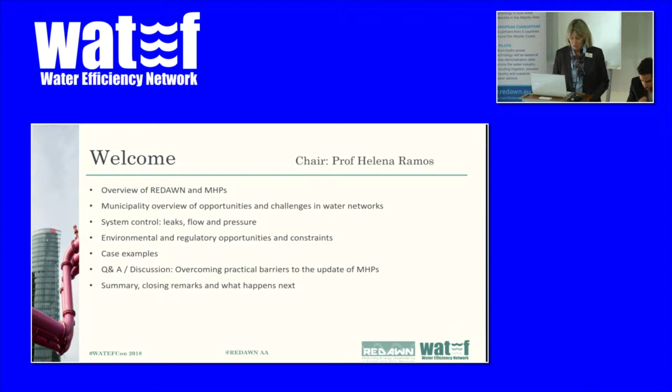Here we'll have our experts, and I pass the word to Dr. John Gallagher, who comes from Trinity College Dublin. He's assistant professor in environmental and system modeling, and is also a member of the REDAWN project. Dr. John Gallagher will give you an overview about the REDAWN project. We have here some information about this. Thank you.

Thank you, Helena, and good morning everyone. Thank you for coming along again this morning. Yesterday, for any of you that were here for the different WatefCon committees, the Water Energy Nexus is what I was representing at the time. This is a core part of what that committee is working on.

I'm just going to skip out here into my presentation. Excuse me for a second. So while I'm waiting for the presentation to be found, the REDAWN project is a project that came about in 2017 through a consortium of researchers and small and medium enterprises to enhance the potential of energy recovery using something called a pump as turbine.

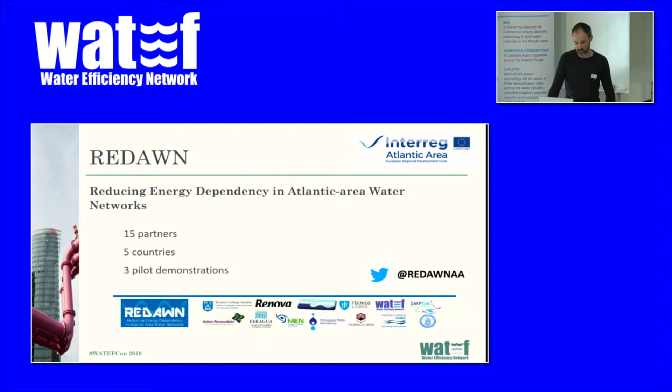For those of you who may not be dealing with water networks, there are many opportunities for energy recovery, and I thought I would provide 2 short, quick examples of these opportunities: one in water supply networks, one in irrigation networks. But our project is also looking at wastewater flows, industry consumption, industry demands, and water provision as well.

In water supply networks, an example of a project undertaken in this area, an initial feasibility study of energy recovery, something I was involved in 5 years ago - we explored Ireland and Wales as an example of 2 small pieces of the EU, and identified 80 feasible sites with the potential to recover 20 gigawatt hours of energy, just in water networks where there was too much pressure being dissipated. That had the potential to save 2.5 million euro in that small pocket of Europe.

There are also associated environmental benefits of recovering that energy, equating to about 10,000 tons of CO2 per annum for the water companies. Those figures equate to about 2% of the required energy for the provision of water. With increasing prices of electricity and water, the opportunity for the water sector to adopt this technology is very attractive. However, there are still many barriers that we need to overcome.

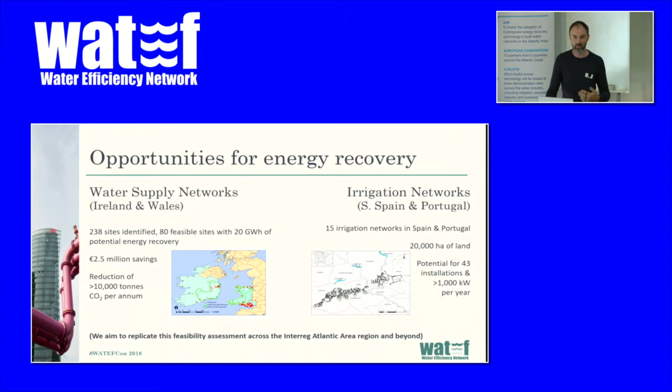So what we aim to do as part of this project is go beyond these pockets of Ireland and Wales and parts of Spain and Portugal, is to replicate how we've assessed the feasibility, to go and examine the potential in our area, the Atlantic area that is represented by our project, but able to assess Europe and beyond in the future.

So a very brief explanation of how micro hydropower in water networks works. You simply have a water transmission network and a water distribution network. And within that, you have various points where there is too much pressure. In these locations, you typically have forms of valves to release that pressure. What we explore is the opportunity to replace those with turbines, so instead of completely dissipating the energy, you recover that energy.

Now, why is this not already just happening around the world, you wonder? It seems quite simple in some ways, and the reality is there's many barriers. Turbines are quite traditionally an expensive component to recover energy, so there is a need for a low-cost form of turbine. Really, no one has assessed the market potential on a large scale beyond 1-2 countries, or a region of the countries in some cases.

There is a need for policy and regulations. There is a need to associate the environmental benefits and the social benefits that can be translated through economic savings and environmental savings. And for us, a key part of our project is a need for pilot projects to demonstrate the technology in action, to be a kind of final hurdle to persuade practitioners, explain to technical experts how this technology can work, and to water companies.

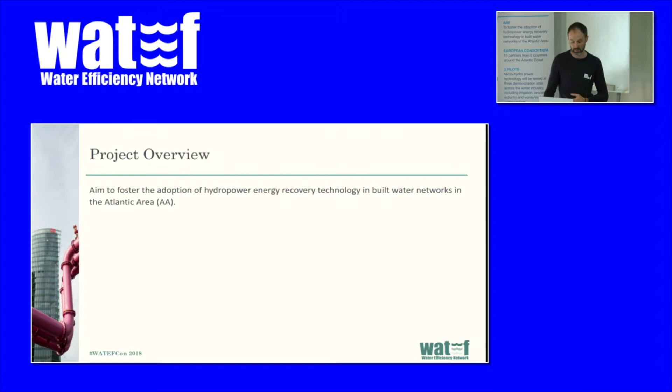So the aim of the project is simply encapsulated in this: to foster the adoption of hydropower energy recovery technology in built water networks. We hope to address institutional, social, and technological environments.

I'm from a civil engineering background, so really I feel more comfortable in the technological domain, if you will. But it's important to this project to address the three different core areas. And I think our speaker before dinner last night mentioned governance, and that's a hugely important element of what we need to deliver, ensuring that this technology is not just limited to physical demonstration and being technologically great.

So for those of you who are not familiar with the Atlantic area, it's an Interreg funded region in Europe, part funded through the European Regional Development Fund, and consists of parts of the island of Ireland, the west coast of the UK, parts of France, western France, northern Spain, and the Iberian Peninsula.

And so we want to look at the resources, what potential there is in these areas in the different sectors, look at what type of off-the-shelf technology can be taken, and look at what is this recovery potential. However, with most research projects, the availability of data to assess this potential is quite the challenge. But that's key to us having industry partners, water companies as part of our central delivery of demonstration sites to assess this correctly.

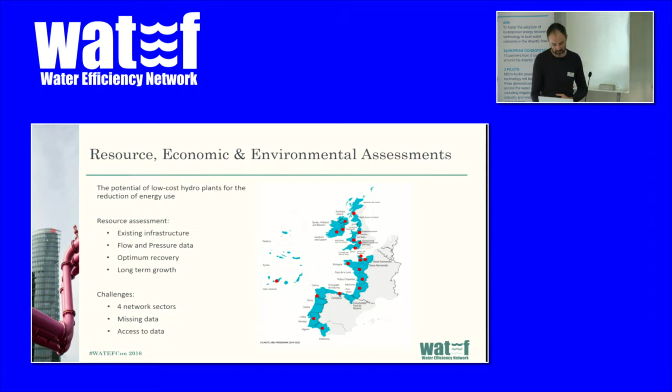And so this pump-as-turbine essentially is a pump taken off a shelf and operated in reverse. We had some of our team present some aspects of the project yesterday. I'm sure the presentations will be available to you at the end of the conference. But it provides a low-cost alternative. It does have a slightly lower efficiency to a traditional turbine. The performance, however, is still not fully captured, and that's an element of our project.

And it doesn't quite allow complete regulation of flow. But there's huge potential for it to work in parallel with existing control valves and allow for extra control to mitigate against leakage, etc.

In addition, the policy and institutional support tools is a key part of this project. So with the technology being developed by our academic engineering partners, we also have key partners delivering an understanding of how water companies work throughout Europe, how governance works across Europe, and how we can implement this in different parts of the EU.

We're delivering the message that it has environmental benefits for both customers and businesses. Our pilot demonstrations will be in operation over the coming 12 months, and for those interested in specific sectors like irrigation, process industry, or wastewater, you can follow our newsletter through the REDAWN website to track how these are being developed and events we'll hold around them.

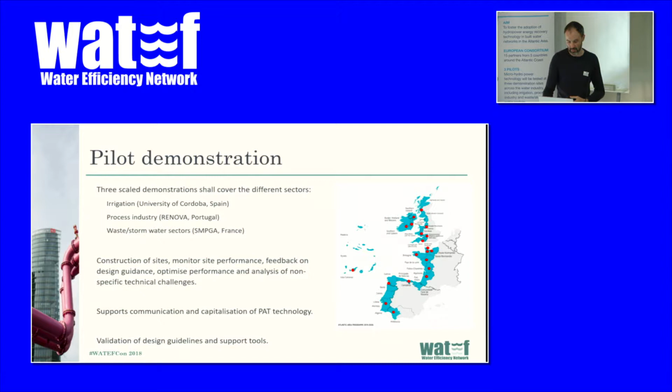So I'm going to conclude with that. Thank you very much for your attention. Our project REDAWN will have 2 more years of activity, and our demonstrations will be a key part of that. I welcome anyone interested to stay connected with us and find out more. Thank you very much.

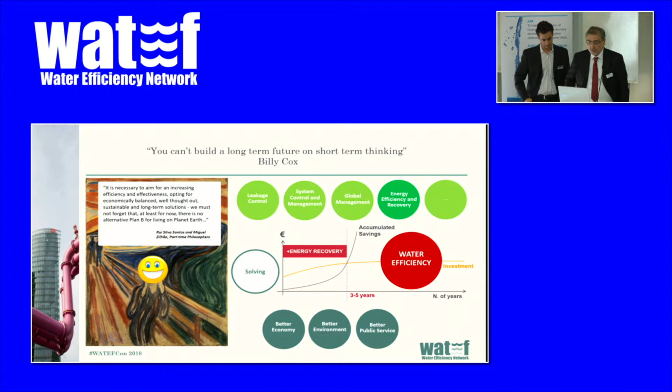So one of these sentences I think is important: we cannot build a long-term future if we think in the short term.

Regarding leakage in Portugal, the average amount is about 30%. In other words, 30% of the water coming out of our reservoirs is not charged. So we're talking about commercial losses. The greatest component is the real and physical component, which is in red over here.

We'll be focusing on that, because that is where we have the main water problem. We have a multiplicity of hydraulic errors and situations that all of us, mainly the people from municipalities, know very well, and we need to solve this urgently.

In terms of the hydraulic balance, what we are focusing on is real losses, in other words, leakages, and by solving that problem, we will solve several at once. We will decrease our leakages, decrease uncharged water, have a more efficient use of energy, and we will have energy recovery — once again, by being more efficient.

Let me just draw your attention to this statistic of 30%. We have several statistical indices to represent a specific problem. The issue is, by making these statistics, the places with higher consumption end up with lower percentages, because they have higher consumption. So this comes into the global pie.

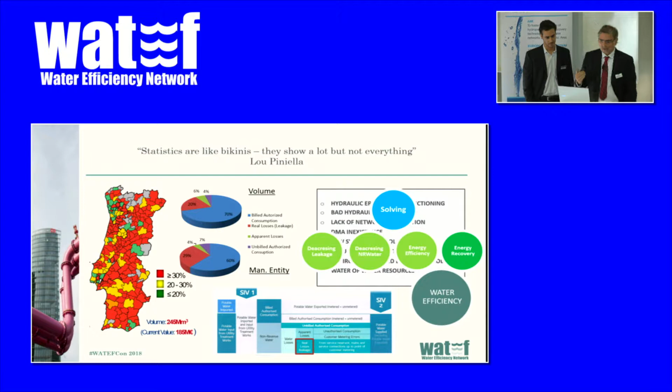In grid control, we have to know what we have and the speed with which we detect and repair our grid. Regarding the pressure part, we have the possibility or not of energy recovery. In other words, if it's possible, no problem; if it's not economically feasible, let's look at something else.

And as we'll see over here, we have several technologies, two of which will be presented right after.

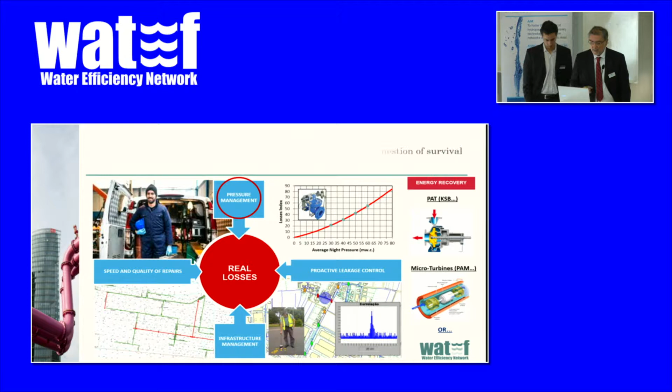We have to overcome these barriers that we've heard about previously to be able to have a better future. We have a whole set of barriers — technical, economic, etc. In the technical part, usually we have two big problems: the question of the information that is available, and human resources to be able to solve the problems.

With each one of them, we also have a whole set of problems. For example, in the municipalities, we have questions related to staff not having availability — each person has to cover several fields — and the information that is available is usually scarce. We need to look for it, etc.

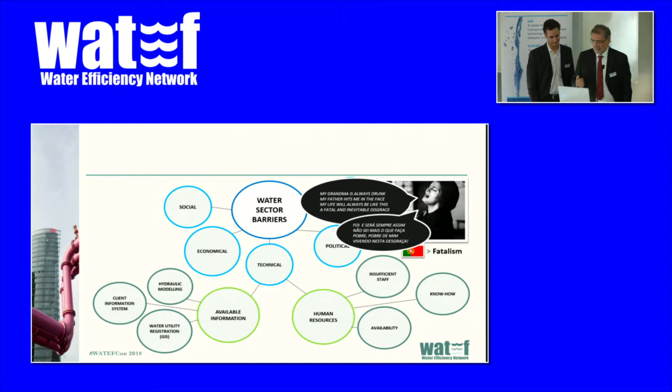Only death and taxes, as our friend Benjamin says. So in this area, it's no use being a fatalist. We need to move on.

Here, in this presentation, we are focusing on these two sides of this equation of water — in other words, the transmission that we will use as supply over here, and distribution.

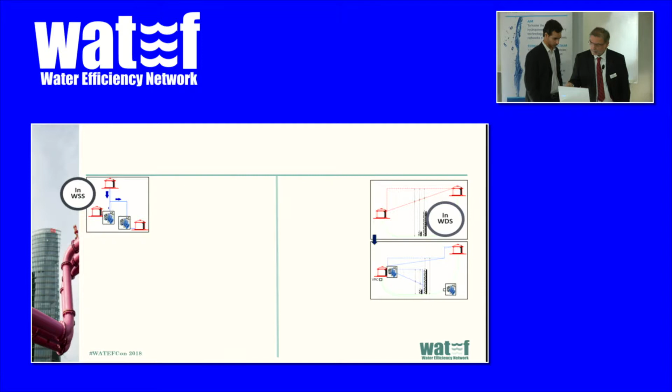In our daily work, we find a whole set of problems in which we have to control reservoirs in situations of transmission or manage pressures in a grid. We need to change the functions. We have to solve the hydraulic problem.

In Cascais, where our friend Pedro was, we worked in São João de Estoril, an area where we lowered the pressure from 5.5 to 4. What happened was, as we see over here, the flow at night decreased substantially to about half, so leakages also went down by about half.

Pipe bursts here in blue also decreased at the time, and the data that our friend Pedro gave us were at zero. At the time, I don't know what happened — he doesn't know either, because he changed jobs.

An example that we are working on at the moment is with the municipality of Santa Cruz. We have Engineer Gustavo, the head engineer of that municipality, in which we have reservoirs from 1,111 up to 0, because we have reached the sea. So we have a great potential here.

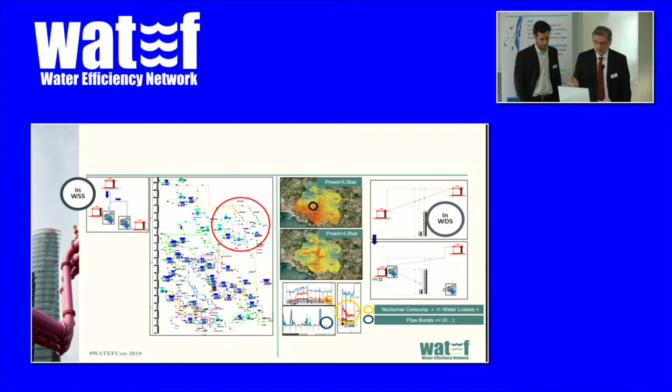Just a small example here in this area, not all reservoirs from the municipality itself, but in which we have a superior reservoir that supplies two inferior ones, in which the dark blue one can only be supplied when the lower level reservoir is full. In other words, we have the possibility of solving the problem with a control upstream of the intermediate reservoir to supply both of them and simultaneously being able to recover that energy. Place a good hydraulic functioning, and then after that we can recover energy.

In the same municipality, we studied a pilot area in which after all modelling, etc., in the existing situation, there were very few levels of pressure. In red, the main level of a reservoir at 180 level, almost up to sea level. So we have an enormous energy potential. By changing the system, we divided this into energy levels, so we also have a potential of energy recovery. But the focus is solving the hydraulic problem, and then we can or not recover energy.

So we need to take advantage of these opportunities to be able to solve the problem and simultaneously, in inverted commas, make money with it, with that energy recovery.

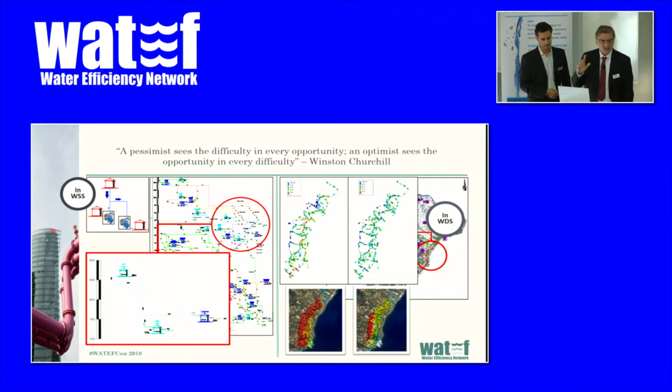Good morning, everyone. As Engineer Rui said, the main focus must be to fix the hydraulical problems within the water network. Only then should we assess the feasibility of energy recovery. In order to do that, we need to know where, how, and to do an analysis, a study of the potential of the energy recovery.

So where this kind of technology can be implemented, as it was referred, in water distribution systems or water supply systems or water transmissions. Of course, the first one, you have more restrictions such as pressure restriction, where you have to ensure the quality for the consumers. You have the total consumption divided by the network, and you have variables such as consumer demand that increase the complexity within the system.

In the water supply system, however, you have less pressure restrictions, and you can determine all of the flow of the consumption, and you actually would require a pressure control. So with a control valve, which Margarida can explain better, or why not a micro hydropower technology?

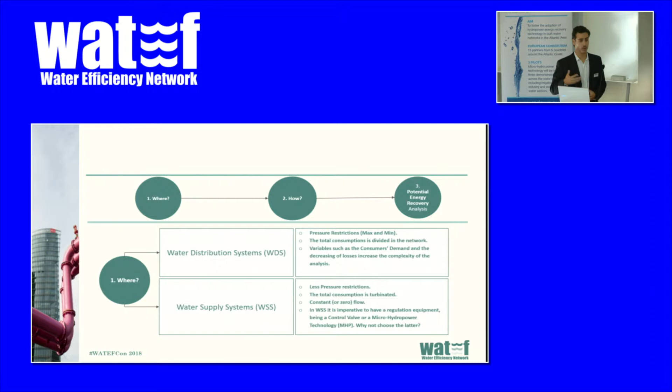So first we need to set goals in order to achieve our reality and to try to implement this technology. But how can we do that?

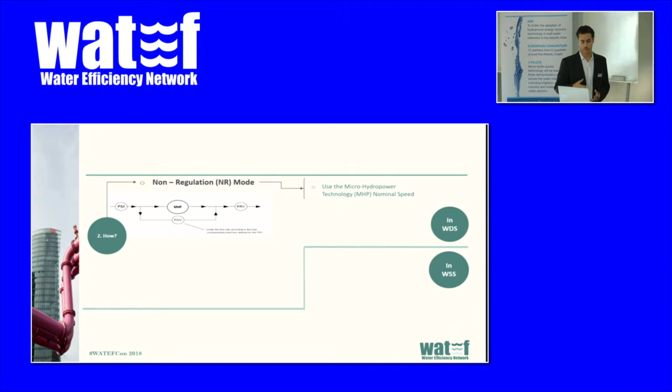In water distribution systems, for example, you have two regulation modes. The first one, a non-regulation mode, where you would require the flow meter and a bypass with a flow control valve in order to ensure the minimum pressure in the network. And you would have to have downstream a pressure reduction valve to ensure that the maximum pressure within the network is not exceeded. In this regulation mode, you would use the nominal speed of the machine.

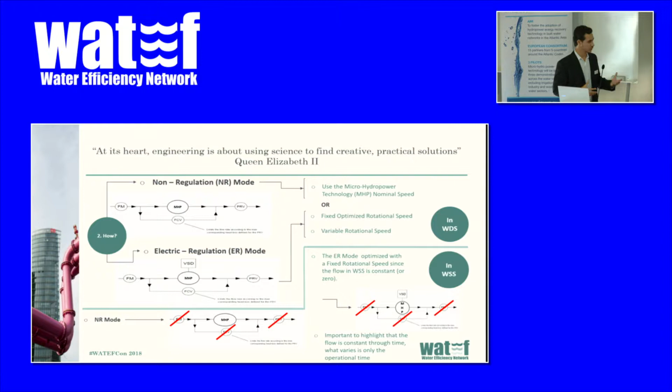Whereas in the electric regulation mode, you would have a variable speed drive that would allow you to fix an optimal rotational speed or to use a variable rotational speed according to the input flow rate within the machine in order to harness more energy. In a water supply system, since the flow is constant or zero, you wouldn't require that many equipments, but you could still use both regulation modes, where the electrical one, it would be more optimal to use a fixed rotational speed. It's important, as Queen Elizabeth II said, to try to combine engineering with science and all these disciplines.

In order to explain how important this analysis is, I'll give you an example in Madeira, in the municipality of Funchal. We did a study there in a pilot zone, where in order to fix the grid, we had to implement 50 pressure reduction valves. And out of these 50, only 10 of them had the estimated potential to actually harness a good amount of energy. And after some detailed study, only 2 to 3 of them actually had a good payback period.

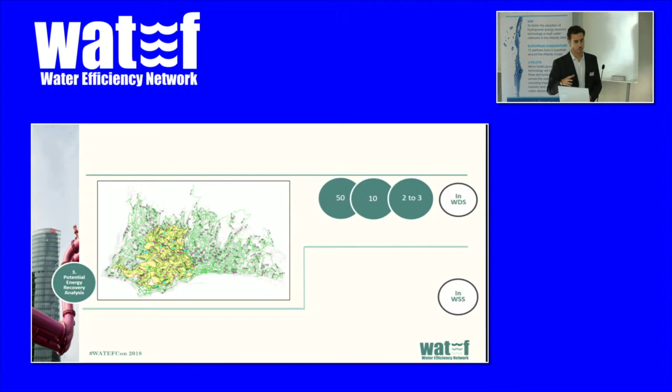So we need to study this first. As you can see in this graph, these show the 4 PRV location sites that would produce the most energy out of these 10 PRVs. You can see that actually only 2 to 3 of them would intersect the initial investment and have good payback periods. But it's important to highlight again that to fix the hydraulical grid, we need to install more pressure reducing valves. So it makes sense to compare the cost with the differential cost between implementing a total micro hydropower technology and its costs, or the difference between it and installing pressure reduction equipment and all its accessories.

And that means that we are talking about more or less 15,000 euros, well, half of the price.

Zooming in on a 5-year period, the analysis carried out before was for a 15-year period, since that's roughly the time required to decrease water losses to 15%. Zooming in on this 5-year period, you can see that the payback period would be 2 years in this latter scenario, and 4 years with the initial cost.

In a water supply system, however, we also did a study in the same reservoir, but this time upstream, because it's a water transmission system.

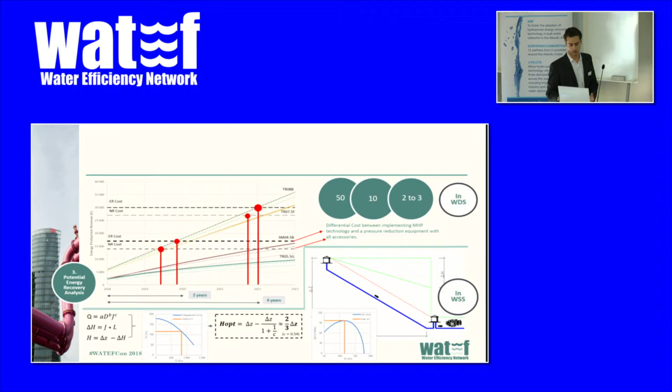Comparing the energy recovery between these systems, water distribution and water transmission, you can see there's a huge gap, because it's more complex to install this technology in a water distribution system. Thus, it's important to first analyze and study it, but first to fix the hydraulic problems within the grid, as this sentence illustrates.

In order to show you how we got to these results, at LNEC we developed a software called Sherlock. Sherlock stands for Selector of Micro Hydropower Technology and its regulation, lowering the operational costs.

This software allows us, as you can see in the picture, to choose different micro hydropower technologies and their rotational speeds, and this example is for a pump turbine, and then get the resulting energy output.

In non-regulation mode, you would use the nominal speed, so the results would be limited, but you can compare with the electrical regulation mode, and this software allows us to study all the rotational speeds and then fix the optimal one.

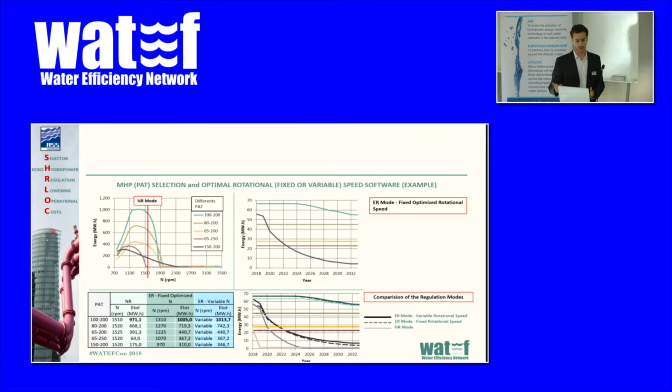In order to harness more energy, we compared this also with the variable rotational speed within the electrical regulation mode, and you can see that this last one produces the most energy. This is for the example of the PRV location presented before that had the most potential.

So the important thing to conclude is to never guess, because you need to first have a study, since our Sherlock never guesses. So you have to first do this study and then carry on to study the feasibility of energy recovery within these technologies.

Just to finish off in Portuguese.

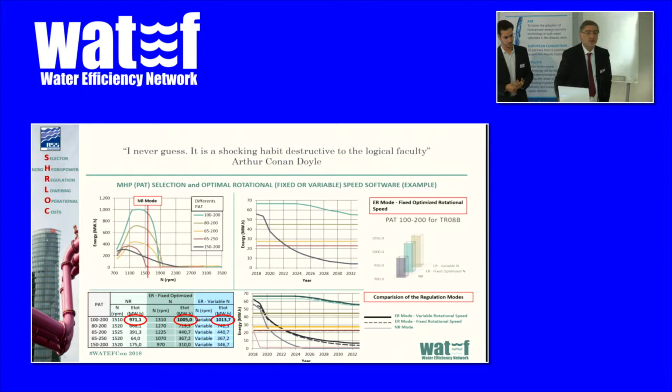In our presentation we tried to give you a global framework of the problems, and always highlight that the first step is to solve the hydraulic problem and see what we can recover, and to develop software for that goal. With the previous experience, we are trying to evolve in the sense that we do not need each person working separately in their own field.

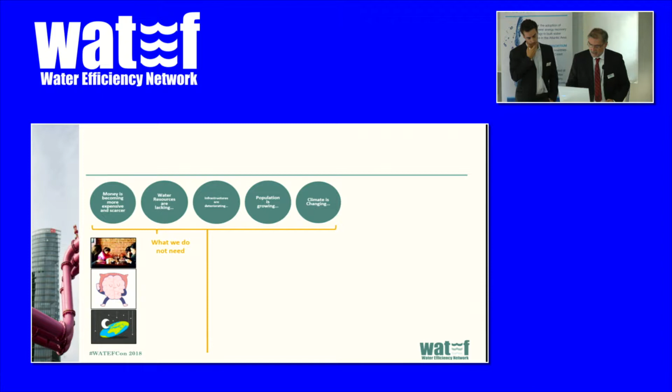This has to be a global effort. We don't want dormant brains. We need the capacity to move on. We don't need to have previous thoughts like 'the earth is flat'. We don't need to be prima donnas of knowledge, thinking 'I need to do something when I have everything, so I'm going to wait until everything comes down to me.' No, we need to move on.

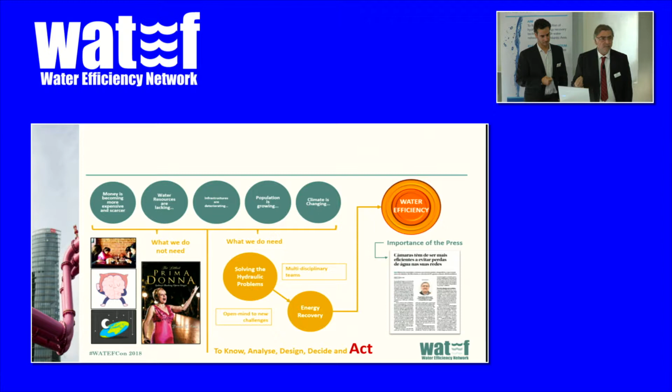We need to see if it's worth it, not only in terms of water efficiency, but also in recovery of money, not just making propaganda with nice faces in the newspapers. In reality, we need to know, analyze, design, decide, and mainly act. We cannot always just think about it.

Because in reality, to solve our problems, we cannot continue thinking always the same way. And that's it. Thank you very much.

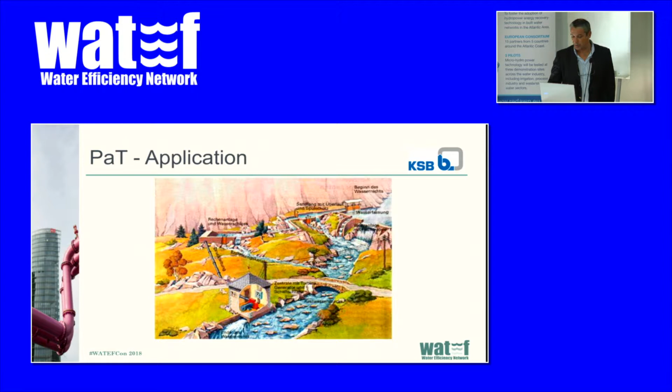And since KSB is a manufacturer of pumps since a long time ago, KSB developed a study to check and test their pumps working as a turbine, because there are some advantages to using the pump as a turbine.

Let's focus first on the turbine. The turbine was developed exactly to recover energy from water, and the turbine is wide in range control. You can use a turbine in several ranges of flow, for instance, with high efficiency. You can use the turbine with accurate design, designed to work for that specific system and with higher efficiencies.

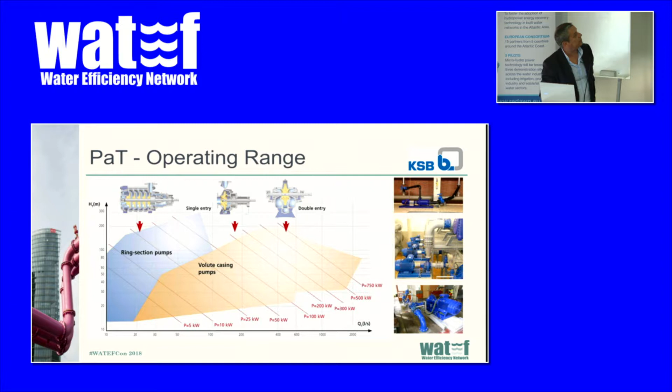We have the water coming in from the top, the rotation is in the opposite direction, the shaft is connected to a motor working as a generator, or even a generator, and could be another rotating machine on the other part of the shaft. And so this is as simple as it looks.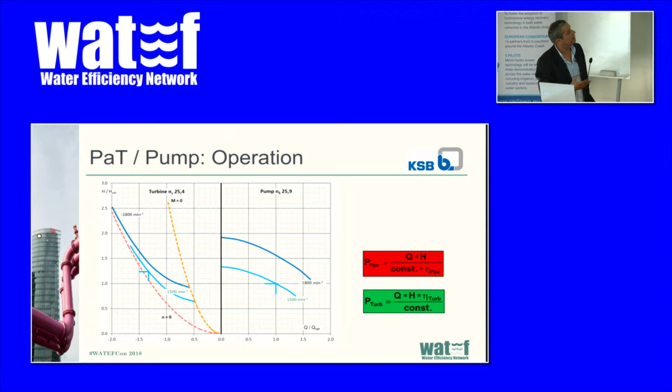We also can see that for a pump working as a turbine, usually the flow for the best efficiency point is a bit higher than the flow for a pump working as a pump, and also the pressure is a little bit higher than the pressure for a pump working as a pump.

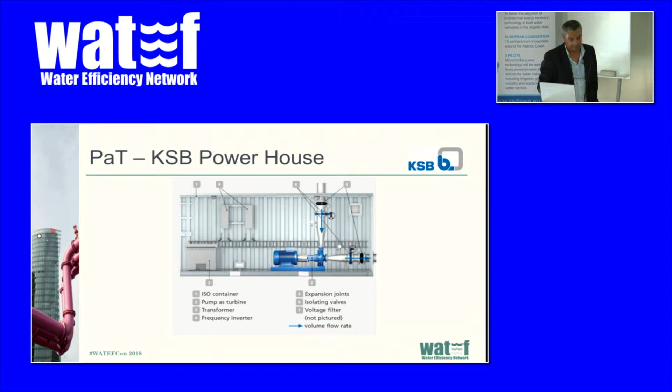KSB was a partner in this project, and they used 3 main pumps working as turbines, connected directly via a gearbox to some pumps. The pumps working as turbine transmitted rotation to the small pumps, and those small pumps could pump the water to the surface.

It had a head of 15 meters with a hydraulic efficiency of about 81%. The small pumps used to pump water to the surface for water supply were multi-stage pumps, each pumping only 16 liters per second for a head of 190 meters, with hydraulic efficiency of 75%.

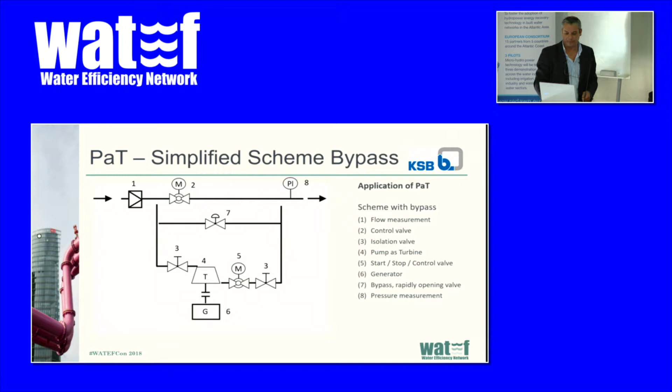Thank you very much.

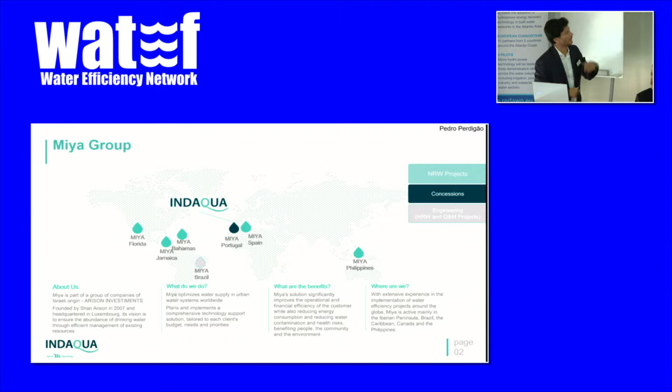So what am I going to do? We heard a lot about the word 'smart' these days. So everything is smarter since we have a smartphone. But are we smarter because we have a smartphone? I don't know. Smarter is something that we can get — intelligent, no, intelligent is a characteristic we have. Smarter is an ability, something that we can develop.

So I'll be talking about smart water utilities, which are kind of like a person, and looking at it from the non-revenue water perspective, because it's an area that involves many departments of the company, so it's a good area to create general motivation and to induce an improvement philosophy, okay?

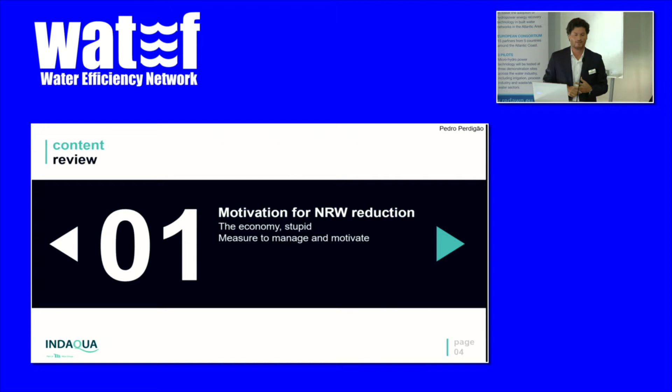So, starting with something that is very important whenever you want to change: it's motivation, okay? So what motivates companies to reduce non-revenue water? In my opinion, it's the economy, stupid — it's the phrase that one of the advisors of Bill Clinton told him when he was deciding in which areas he should direct his campaign.

So the idea is that people are motivated by economy. Believing that, what makes water utilities more motivated to reduce non-revenue water? On the right, you have the high, on the left, the lower motivation.

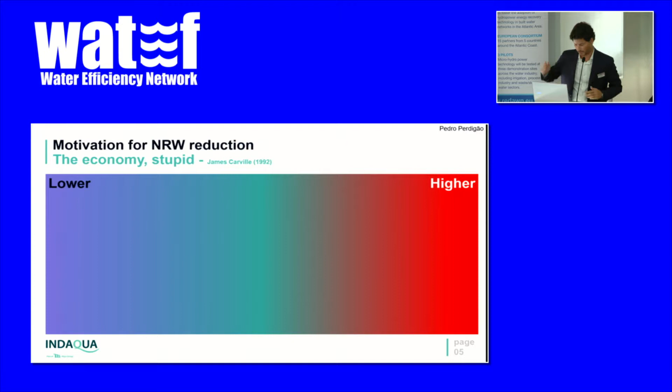The first one is, are the consumers paying for water losses? In many cases, it's a public entity, all the costs go to the tariffs or to the taxes, so the water losses doesn't have any impact on the company, it's all going to the consumer. In other cases, some companies earn some or lose some if they don't achieve an amount of non-revenue water. So if the water utility is partially assuming the cost of non-revenue water, the company will be more motivated.

A different thing is, where is the water coming? If it's a vertical system, where you take out the water and treat it, it doesn't have such a high economic value than when you're buying the water from a different company. So whenever you import water from a bulk water supplier, you're probably to be more motivated to reduce non-revenue water.

In some cases, those contracts have minimum consumption. And I've been in water utilities that had gone down by reducing water losses below the minimum consumption, so they were supposed to gain nothing and still pay for minimum consumption. So minimum consumption can be a motivator or non-motivator for reducing water losses.

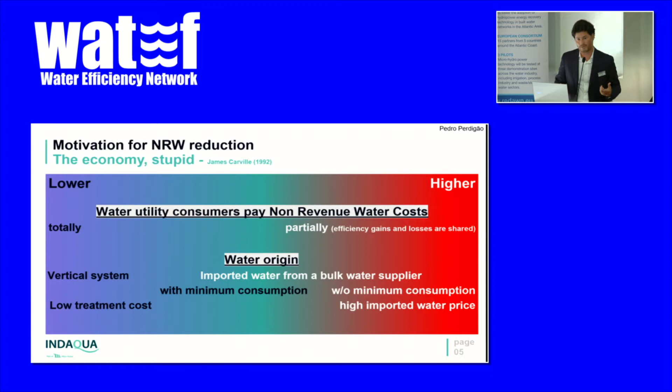And a different thing is the high water price. I think that water has more value than just the cost of bringing it to our homes. The scarcity and the tendency that we're seeing should increase the value of water. So if you have higher cost of water, you have more motivated water utilities.

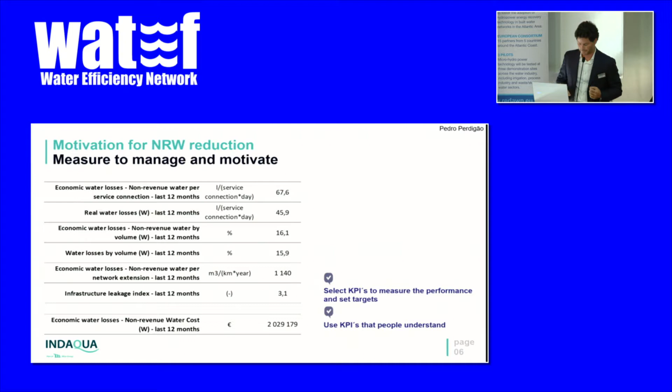Efficiency is so, the percentage is so good that even journalists understand it, but it's bad to compare companies, okay? So for instance, why not use an easy indicator in the water utility that is the cost of non-revenue water? If you put that in the P&L, I'm sure that it will probably become a more urgent matter. So measure and use KPIs that people understand.

Another thing very important is monitor. Monitor things, monitor hourly, monitor daily, monthly, yearly, depends. But monitor, measure, and benchmark. For instance, in INDAQUA, we have 6 companies, and they're all measured monthly on the performance indicator that we are using for non-revenue water, which is non-revenue water per kilometer of network. So monitor, put red lights, show that things are different, it's not everyone having the same results.

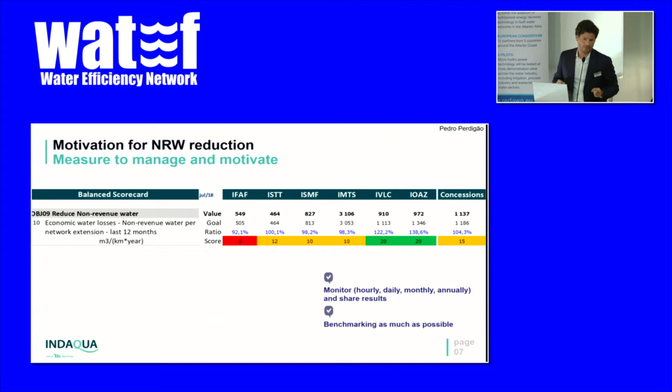About benchmarking, and about the percentage being a good example, you have to do it right. Not just using the right indicators, but also use a good source of data when you're comparing to others. In Portugal, our regulator has a very good source of data. There's another one called IBNet, but it's voluntary, it's not audited, but it's worldwide. But you can have good benchmarking just using the data that our regulator puts for free, it's public. So please make sure that you're not a little bit wrong with the image that you have of yourself.

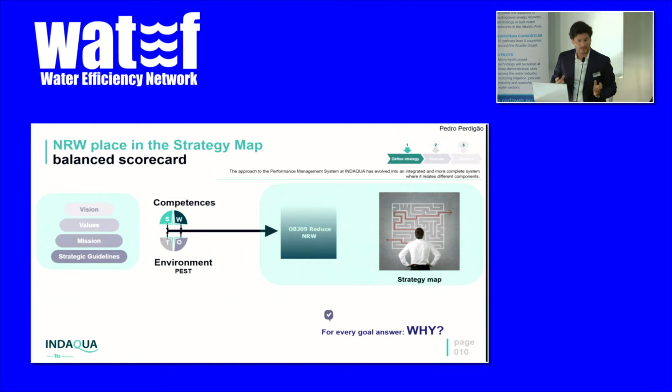So, what's the place of non-revenue water in the strategy? First of all, why should it be a goal? And you need to answer, for every goal you have, you need to answer why. So you go to your competences and to the environment, a SWOT analysis, very typical. And if you can combine a strength with an opportunity or a weakness with a threat, then you should have this non-revenue water. Maybe it doesn't need to be in the strategy map of the company, but you have to answer why, and why is very important for motivation.

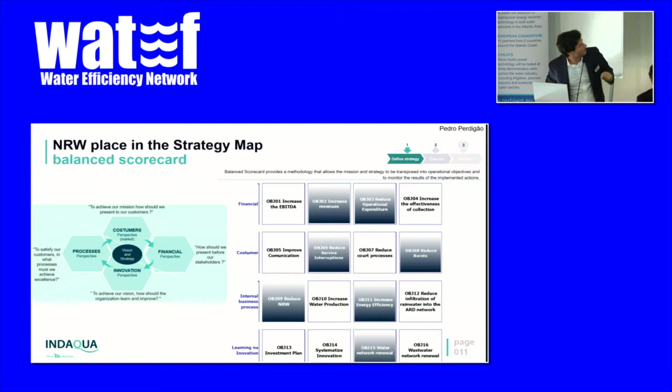Then there are tools like Balanced Scorecard, where you place in the map your goals, organize them, and it's a good tool to explain to people what's your strategy. And that's the place of non-revenue water in the global map of goals, in the strategy map of INDAQUA. But I like it because it interacts with many areas. For instance, we have water network renewal, or we have reduce service interruptions, or reduce bursts, and all that is related to non-revenue water. Remember that reducing bursts saves costs and increases revenues because people have water available, so they'll use it.

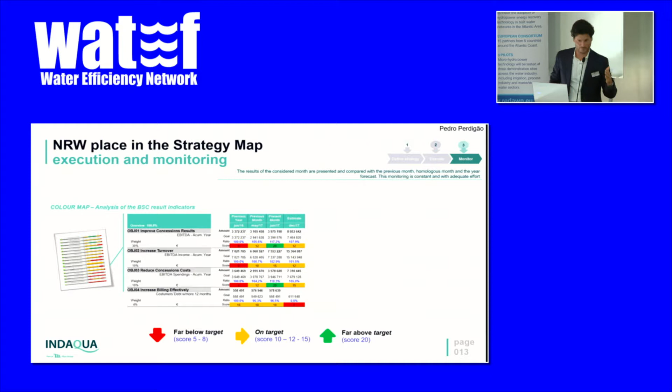If you answer the question why, and it's a goal for the utility to reduce non-revenue water, then answer the question how. Things don't happen by chance, you need to have a plan. This is just an example of the measurement we do, and some examples of the goals. Every month they are rated, and according to the deviation of the real value to the prediction, they are graded. We use the Portuguese school classification that goes from 0 to 20 because I find it more motivating.

So what's the difference between intelligent and smart? I think water utilities are a little bit like whales. They're so big, they're so protected, they don't have to be smart. They have a huge capacity for thinking and analyzing, but sorry to say it, as Rui was saying, they waste a lot of time just thinking about it.

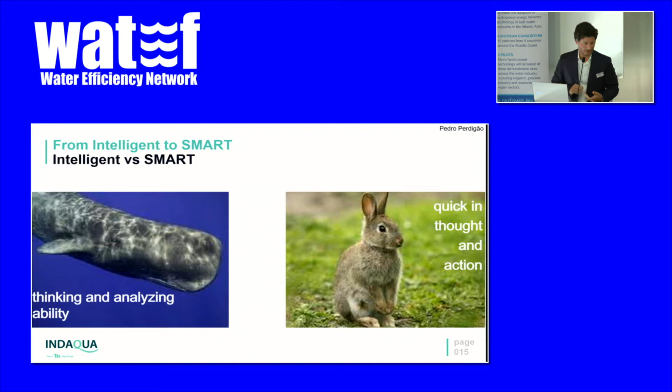And I think they need to become smarter. This is a smart animal. Why is it smart? Because he has good sensors - his ears, his eyes, his nose. He's very rapid thinking, and he has the muscle on his back legs to jump and get out of there because the wolf is coming. So he needs to be smart, and he can get smarter. So if you want to get smarter, you have to have all these dimensions.

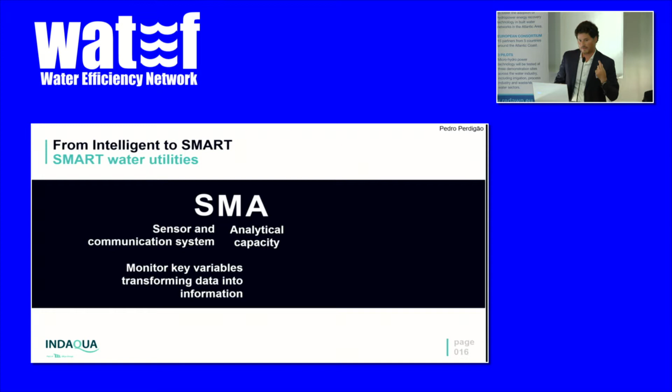Sensors - water utilities have been investing a lot in sensors, placing flow and pressure sensors and all of that. But then, as someone was saying in the morning, that means big data, so you have to filter, synthesize, transform data into information, and then you need analytical capacity. You need rapid thinking and decision-making, and of course you need the resources, and you need to be fast - you need timely actions. That's why we call it smart.

You don't need to stop being intelligent, because that's something you cannot change - it's a characteristic, it doesn't evolve. It's born with you, so you can still be intelligent, and you should understand the concepts, but I think water utilities need to be smarter.

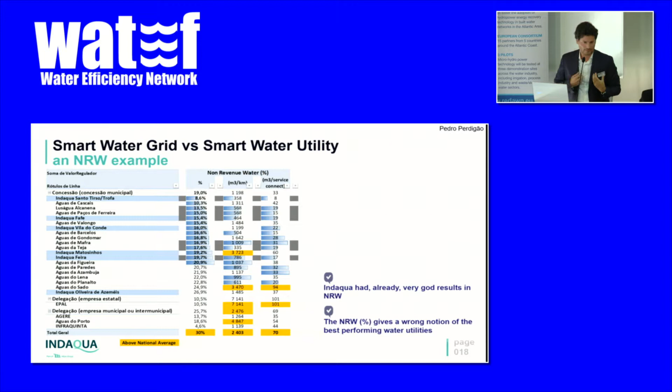So we did this analysis, and we thought, well, some of them are on top on all 3 indicators, so we believe some of them are very good. But what happened was that INDAQUA had gone down in non-revenue water per kilometer until the year 2013, and for several years was stable. We had, for instance, an ILI, an infrastructure leakage index, lower than 1, and our meter error is estimated at 2.6% - we take samples and do analysis.

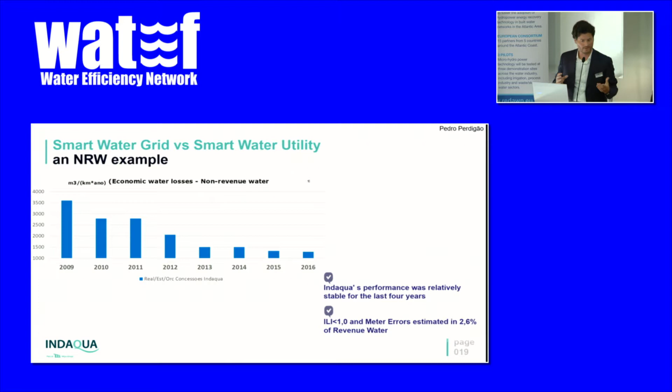So what could we do? First we did was, let's see if we are looking at the right variables, the key variables. We were using an automatic system - we decided it was like stop thinking, let's send data to that machine and she will tell you when there's a leak, send people to search for it. But we were not understanding the process.

So we went back a little bit, and decided let's see if we can put it on a human size, so that people really know the DMAs, know them by heart. It's not just having faith in a monitor. We also worked on the speed and quality of repairs and on the speed of leak detection. People forget, but we can do leak detection in many different ways, with many different supports, with good management, with good incentives - so we changed all that.

So what happened is, the blue line is the percentage of our network that we search per year. We went from 100 to near 300%, so we are searching 3 times the length of the network. The black line is the number of leaks we detected and repaired. That also increased. Nowadays, the number of leaks has stopped growing, while we're still increasing the percentage of search. So maybe we've reached a point where we should stop putting more effort into searching for leaks.

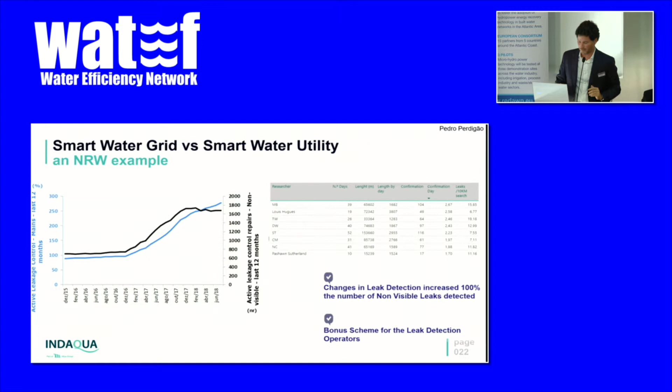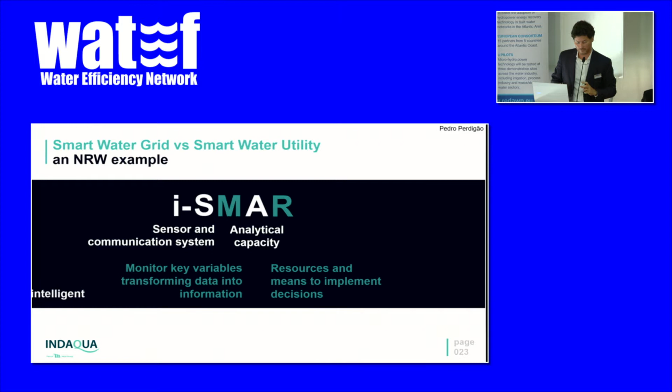Going back to that smart thing I was talking about, I think INDAQUA became smarter with the work we've done. What we did was work on the key variables, and we also worked on the resources. We improved the efficiency and effectiveness of our team, so we start finding leaks sooner, because I don't believe we are producing more leaks, we're just finding them sooner. That number must go down sometime. Okay, so that's it. Obrigado.

We developed this project together with the European partner based on 3 fundamental ideas. One was the fact that we have been hearing for a long time about renewable energy. We wanted to combine that with innovation to find a truly innovative solution for the market, an accessible, affordable solution with excellent revenue that could become attractive, with a service life of at least 25 years, and which could also be eligible, in our country and other European countries, for European funds. So the idea was to use the energy available in water supply systems.

There was also an idea in our mind to allow, in some systems, especially irrigation systems, which are usually in areas of difficult access where the electricity grid does not exist, we were constantly asked to try and get energy so that we could supply the tools, but also so that we could communicate that data to the managers of the systems. Besides that, there was also a need to develop the project with an interesting payback period so it could be motivating, because today the economy masters our whole life.

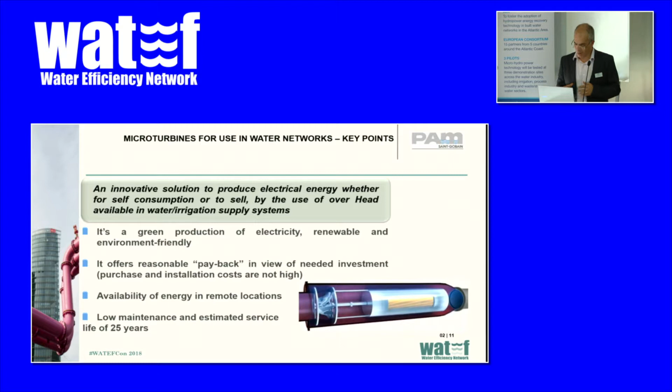So as I said before, we wanted a tool allowing us to supply energy in remote places, something easy to install, not a complex device, a very simple thing. And so we had to think about the following.

We all know that most water supply and distribution networks use pressure-reducing valves to create a head loss, to stabilize the pressure downstream and maintain it at a constant value. By doing that, we are wasting energy. We all know this principle: we have an upstream pressure that we want to reduce, and with such a control valve, we are wasting energy. Often this type of equipment is not working under the best hydraulic conditions, or not within the hydraulic parameters for which it was designed.

So this is the situation you can see here. We want a head loss, but there's always the risk of cavitation, which reduces the service life of the equipment.

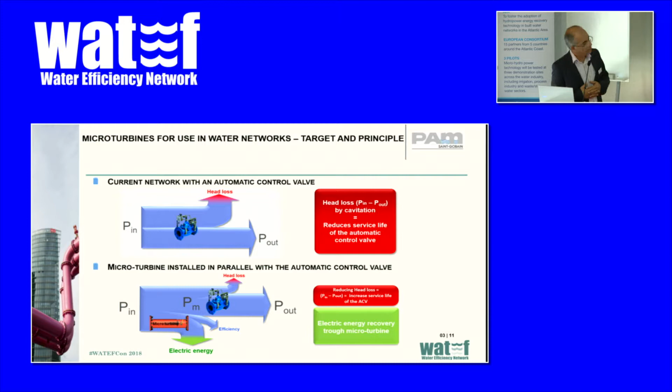So we thought of going to the same places and imagining the following: we are wasting energy here, so we have to implement a solution, and this is nothing new - there have been plenty of situations studied like this. We will place a micro turbine together with those valves, and try to reduce the head loss, the delta P, that the valves had before, so that we can recover a little bit more energy by using the micro turbines. So this was the principle underlying the project.

The equipment itself is very simple. It has a flanged tube in conventional carbon steel. It has single stage or multi-stage turbines with several diffusers and rotors. In the cross section, you can see the turbines at the entrance of the steel pipe. There is a mechanism making the connection between the turbines and the generator, and the generator is inserted in this steel pipe.

The water from the system, drinking water or water supply systems water, flows on the outside and helps cool the generator. It's a shielded generator, and there was also another assumption that we needed to make sure about.

We know that in water supply systems there is a high risk in some boxes, chambers, or confined areas. There's always the risk of flooding, and so we had that in mind. How could we insert micro turbines in facilities that had the risk of flooding? While developing this solution, we had to make it watertight, so if a flood occurred, we had to make sure the equipment would continue operating in normal conditions without any kind of risk.

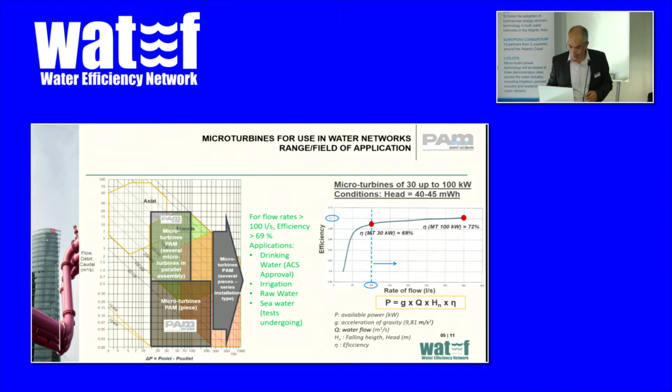On the right-hand side, you can see a graph showing the total efficiency. After 100 liters per second in a micro turbine of 30 kilowatts, we can reach an efficiency of 69%, a total efficiency of 69%. A 100 kilowatt micro turbine can reach 72% efficiency for flow rates of around 250 liters per second. So this is one of the examples.

Pressure reducing valve chambers is another possibility for the installation. This is the typical diagram of a pressure reducing valve chamber. The blue is the existing installation, and in red and pink is the part that we can build, sometimes without requiring civil construction work, and we can do the bypass and install a micro turbine.

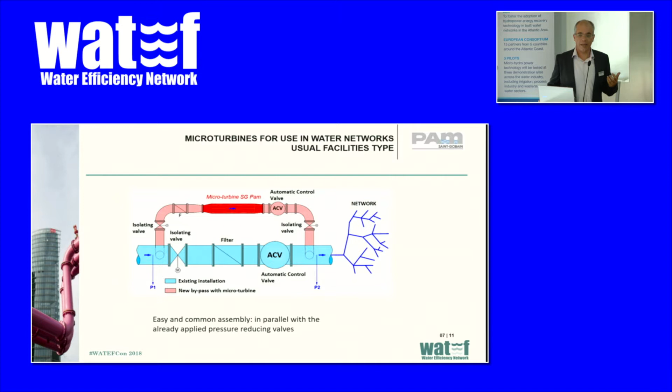Many could say, but why do you have that ACV valve there? What is it doing there? It is ensuring the 15 meters height. So at least between the entrance and the exit of the turbine, I need to have 15 meters. In a water supply system, I have to ensure that water column. That's why I cannot have a direct connection. I have to have a pressure difference between the inlet and the outlet.

Another type of facility, another type of installation: if I have enough pressure and flow rate, I can have parallel micro turbines.

To wrap up my presentation, this is a financial table that we drafted based on 7,000 hours of our working time. This means more or less 290 days. And we can see the different powers from 10 kilowatts to 300 kilowatts. We can see the installation costs, the maintenance costs. You can see the amount of energy recovered. For example, a 300 kilowatts unit produces 2.1 million kilowatt hours.

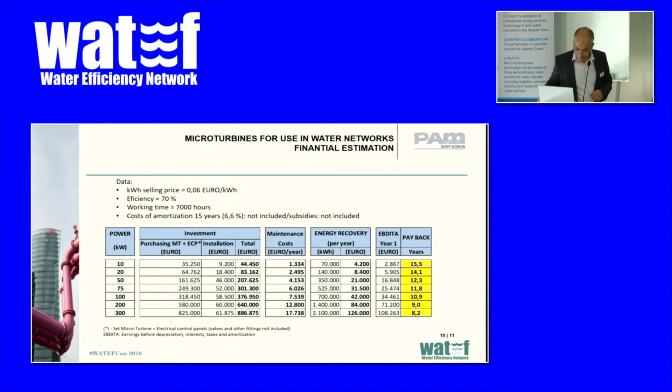So you can now calculate the EBITDA, which after 1 year is 108,000 euros, and therefore the payback will be in 8 years. These are just a few examples to show you the return period that you can have in each case. Thank you.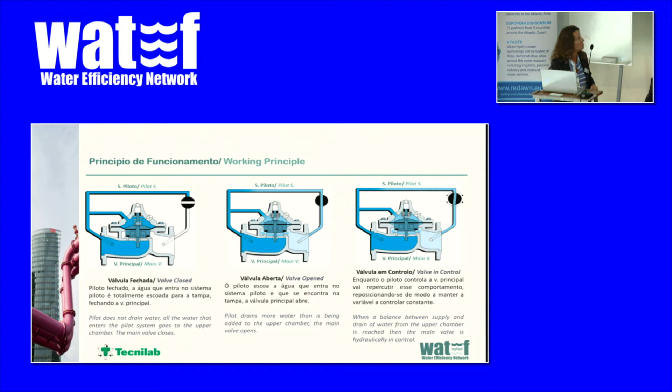In this presentation, I'm going to divide the systems into two main divisions, because this has to do with the result that we can have from the action on those systems. We have the water transport and water distribution system, so different complexities, and here I'm talking about only the technical issues. In other words, pressure measurements and level measurements in a transport system are completely different from the distribution system, so I'll divide this presentation into those two fields.

In the transport system, we have a water origin which is not represented over here in this schematic. This represents transport from the reducer to the storage reservoir. We have a known origin with stable conditions of pressure and flow. We have transport to the reservoir, and we have a level control in that reservoir, which is common practice in 99.9% of facilities. This is how they are working.

They have a level control, and if this load is too high, it can have a pressure reducing valve or not. The conditions are stable, and here I'd like to make an analogy for the need that all bodies have of maintenance, in other words, for stable functioning, and also the frequencies of maintenance. We need stable functioning conditions, which will cause fewer problems in terms of longevity and the life of the equipment.

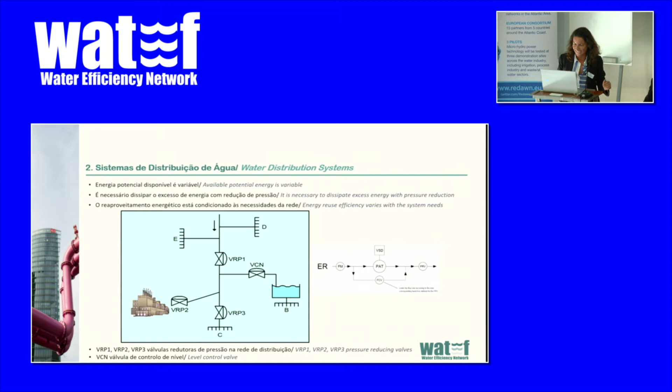Regarding the issue of pressure and pressure management, what we want in a distribution grid is to maintain this value as low as possible, meeting the needs of the grid without placing too much pressure on it. They have distinct capacities and functions. Leakages exist; we cannot eliminate all of them.

If we maintain pressure at the lowest possible level to satisfy all consumers, we can for sure have less water being lost in the places where we're already losing some. Regarding amplitudes, the lower the variation we are able to get in pressure amplitude within the grid, the lower the stress we cause in the pipes, and so the lower the frequency of leakages we will have.

Now let me move on to the final part of this presentation, which has to do with pressure management models. Okay, let me speed up a little bit. I had left this out, but I'll put it back here for a simple reason: the efficiency of applying a simple reducer in a grid where pressure is not being controlled or minimized often has more impact than placing a super valve with super control, pressure measures at a critical point, and an automaton, than placing a simple pressure reducer.

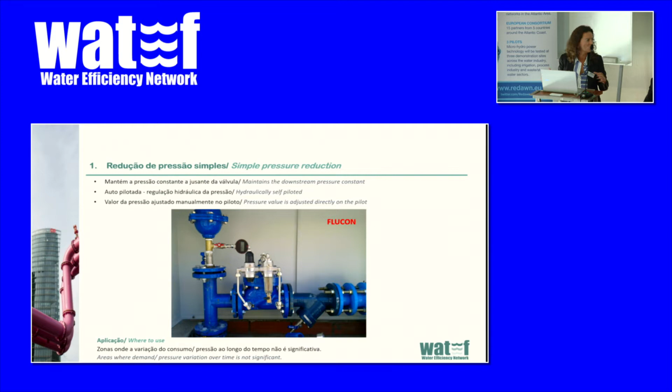I think you mentioned this in your presentation, in the case of Cascais, where you had this bypass. Sometimes we overlook that 1 bar, 1.5, or even half a bar can make all the difference depending on the characteristics of the grid. That's why I think, and I share this opinion with my colleagues, it's important to know, measure, analyze, and take the steps after the analysis.

In terms of the sophistication of the solution, it can also allow us to have a result in efficiency and a reduction of leakages and losses, which is proportional. We can use in the grid models of remote control of these valves, through the measurement of pressure and flow. Here we can have support from electrical supply, or the reducer can be standalone and completely self-sufficient.

If we want modulation per consumption to adapt 24 hours a day to the characteristics of consumption, we have to have instruments. We have to have pressure measurement and flow measurement and automation of controlling the valve, and all these need to be supplied. If you can have energy reuse that can also supply these instruments, that will be the ideal condition.

To end off, the maximum optimization will be remote node modulation. We have pressure measurement in the grid where the pressure is at its lowest, and we have the transmission of its value for the control valve or the automaton that will control the control valve.

Difficulties in applying this - it's the most sophisticated solution. It's the one that allows us to have the best results, but it's the most complex to install, because to know the critical point and to be in a point that is easily measured, we need pressure measurements from this place to the place where we have the valve or other instruments. It has to be very well assessed, and we need to evaluate the costs of implementing this.

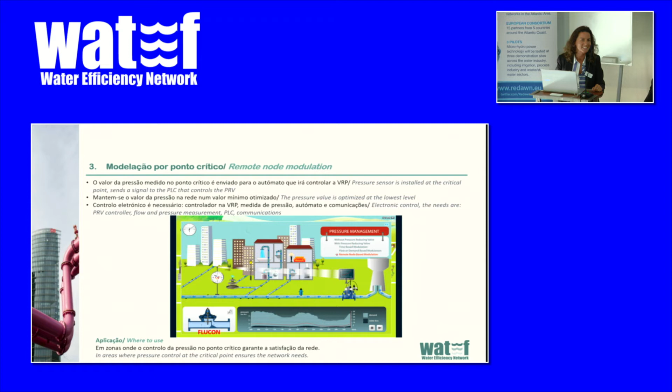So the application for control valves, like any other form that will contribute to energy efficiency, we should take a look at these conditions. Thank you very much for your attention.

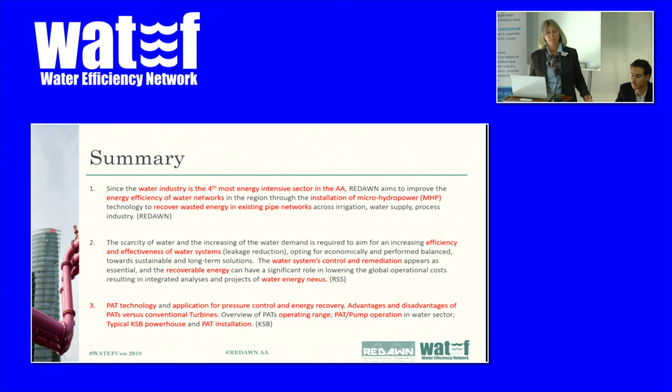In terms of the solutions from KSB, engineer Nuno Aleixo presented the PAT technology. Different configurations can be obtained, comparing a pump and a pump working as a turbine in reverse mode.

The fourth point was about some key factors for success in water loss reduction, presented by INDAQUA, engineer Pedro Perdigão. The motivation to change is very important, along with the definition of the best strategy to obtain good performance indicators. If you have these good performance indicators, this will affect the overall performance of the system.

Last, but not least, control valves and potential energy recovery are quite important for the efficiency of water systems. This conference is about water efficiency, and it is correlated with several types of valves that we need to install in our water networks to control pressure, control flow, and why not also incorporate microturbines in this type of valve.